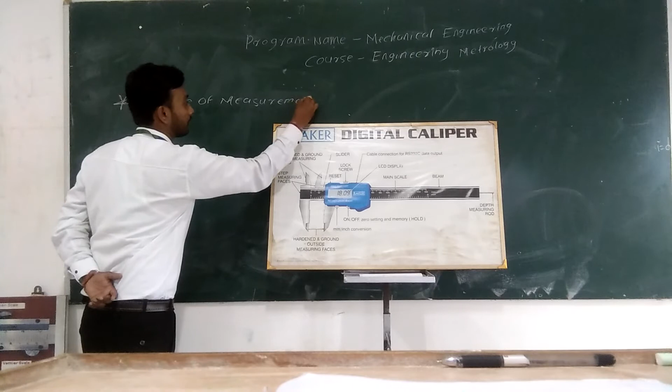What is metrology? Metrology is the science of measurement. In any industrial application, measurement is necessary.

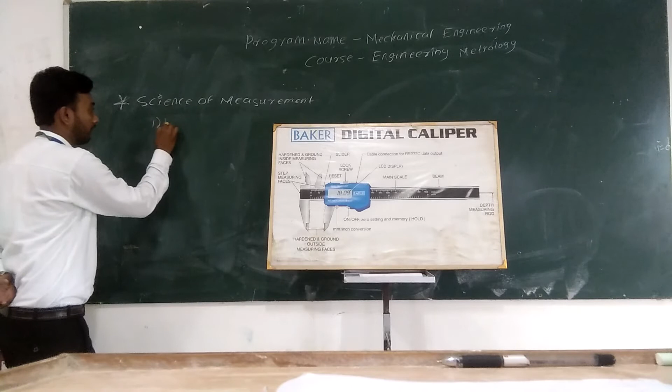For measuring purposes in metrology, there are four basic instruments used: vernier caliper, micrometer, dial gauge, and height gauge. These are the four basic instruments used in metrology for measuring purpose.

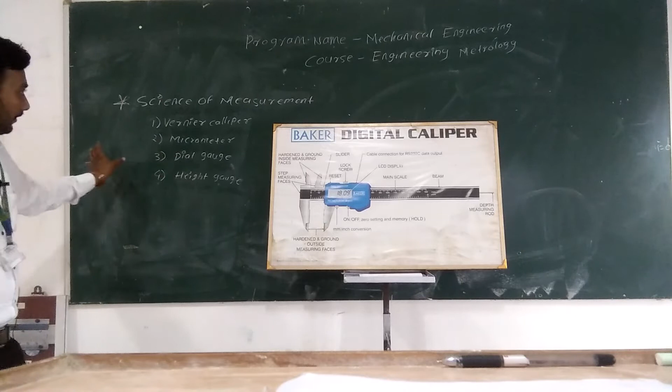Today we are only focusing on vernier caliper.

Before taking a reading, let's see what the vernier caliper is and how it looks, and its parts. This is the digital vernier caliper. Vernier caliper has two types: mechanical type and digital.

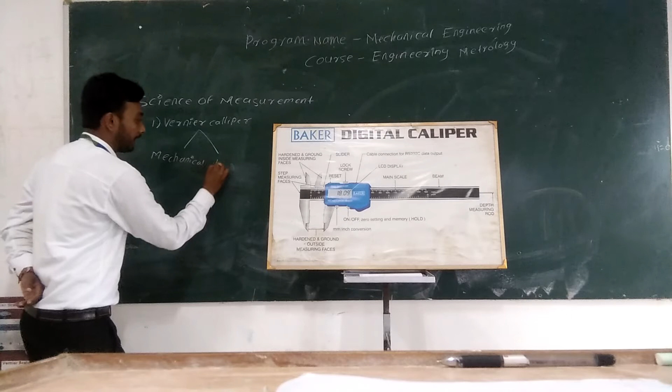The only basic difference is that in digital vernier caliper we get a direct reading on the LCD display. In mechanical vernier caliper, we have to calculate the reading.

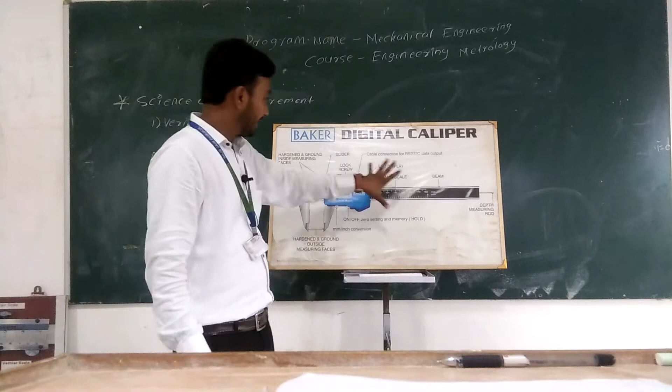These are the basic parts of the vernier caliper. On the upper side, hardened and ground inside measuring faces - that is the upper jaw. These are used to measure inside dimensions of a workpiece, that is the inside diameter. On the lower side, hardened and ground outside measuring faces measure the outside diameter of any workpiece.

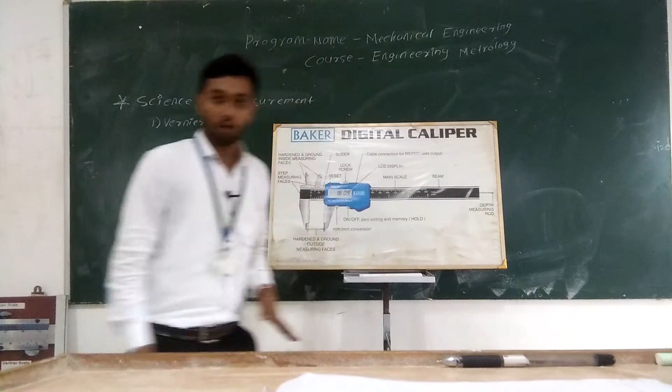On the right hand side, there is a depth measuring rod, used to measure height or depth of any workpiece. These are the basic three functions of vernier: inside diameter, outside diameter, and height or depth of any workpiece.

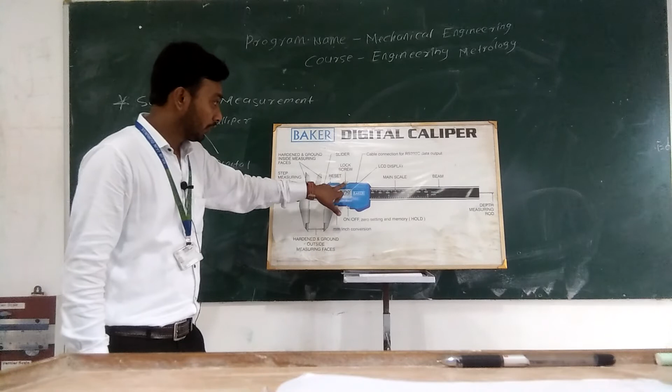Other parts include a lock screw to lock the vernier reading, on the bottom side an on/off or zero setting button, on the upper side a reset button, and the LCD display where we directly get the reading in mm or inch as needed.

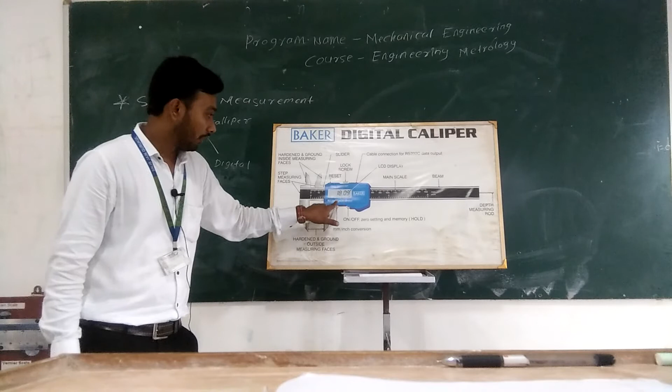In the vernier there are two scales: main scale and vernier scale. This is the main scale, this is the beam.

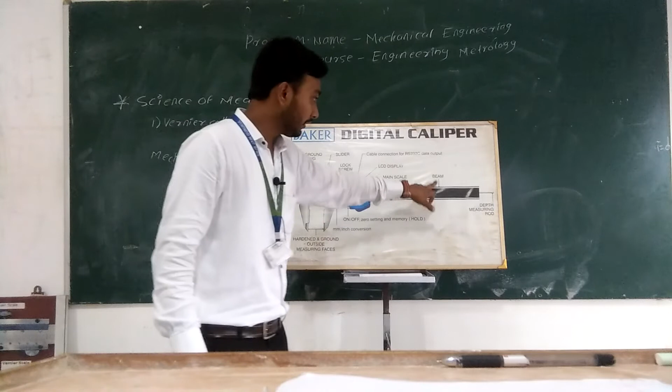Now we study how to take a reading on the vernier caliper. This is the actual vernier caliper. These are the lower jaws for measuring the outside diameter of any workpiece. The upper jaw measures the inside diameter. This is the depth rod to measure the height or depth of any workpiece. This is the main scale, this is the vernier scale, this is the lock screw, this is the slider.

Two scales are present in the vernier: the main scale and the vernier scale. The vernier scale is on the bottom side, the main scale on the top side. These are the two scales.

Any instrument has some least count. What is the least count? Least count means the smallest value that can be measured using that instrument. The vernier caliper also has a least count. What is the formula for least count? Least count LC is equal to the value of the smallest division on MS, where MS means main scale.

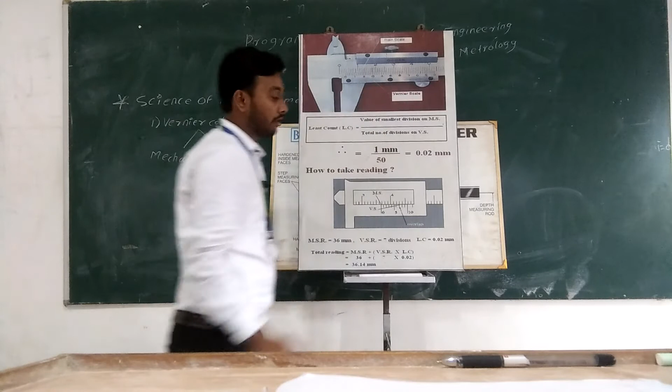Where is the main scale? Here - value of smallest division on main scale. What is the value of the smallest division on the main scale? This is 1mm, up to 10, then up to 20, then 30, 40, 50. Which is the smallest division? 1 mm. That's why here it is 1mm upon total number of divisions on VS.

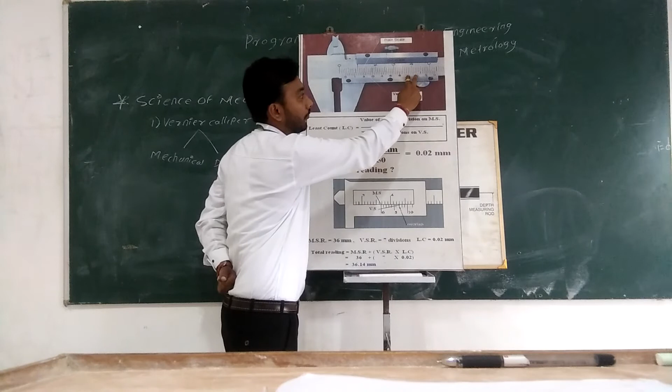What is VS? Vernier scale, here from the bottom side. Total number of divisions on the vernier scale: 1, 2, 3, 4, 5, up to 2 it's 10, up to 3 it's 15, 20, 25, 30, 35, 40, 45 and 50. What we want is the total number of divisions - how many is it? 50. Divide by 50, 1 divided by 50.

That gives 0.02 mm. This is the least count of the vernier caliper. So we can measure up to 0.02 mm, which is the accuracy of this vernier caliper.

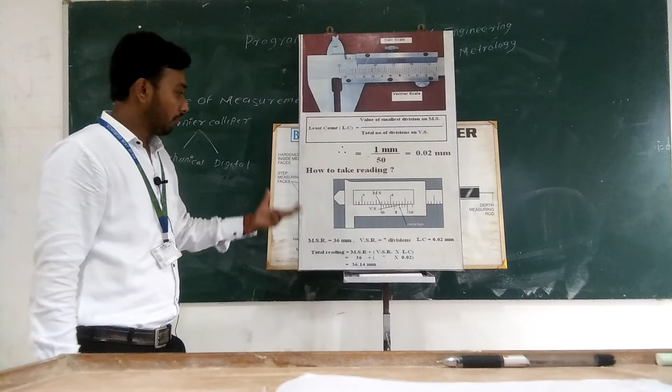Now we see how to take readings on the vernier caliper. We have two jobs: one is hollow and one is a rod. This is the actual vernier caliper. If we have to measure the outer diameter of this workpiece, which jaw can we use - this one or this one? Because this is used for outside diameter, this is used for inside diameter.

We can see this is used for outside diameter, and if we have a hollow job, we can use the upper jaw for inside diameter measurement. Or if we have to measure the depth or height of any job, we can use the depth gauge to measure the height of any workpiece.

So now we can measure the dimension of this workpiece. For measuring there is one formula: total reading is equal to MSR, main scale reading, plus VSR, vernier scale reading, into LC, where LC means least count.

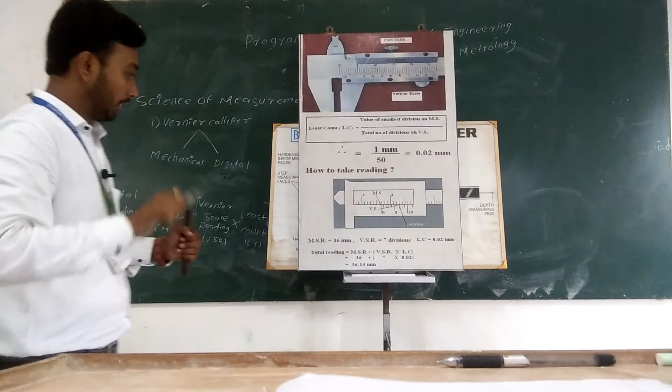Now we measure. If we have to measure the diameter of this workpiece, what is first? Main scale reading. Where is the main scale? Main scale reading - it is 36.

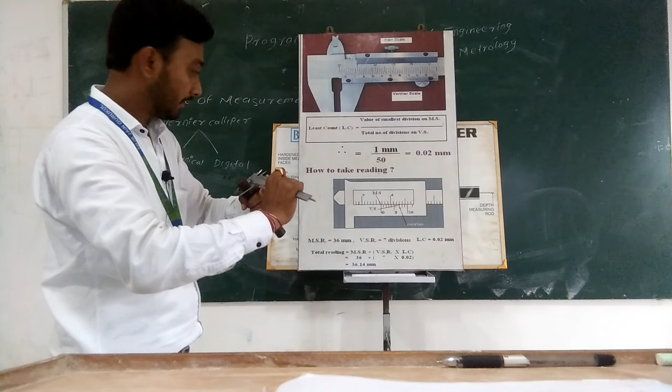Plus vernier scale reading - where is the vernier scale? Here on the bottom side, vernier scale reading. So we have to measure the divisions - it is 7, into least count. What is the least count of the vernier? We can see it is 0.02.

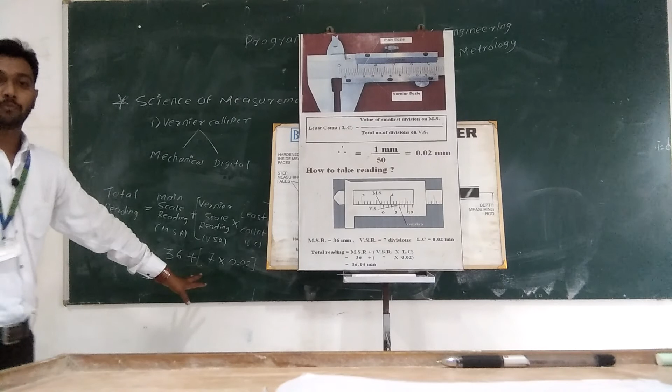What is the calculation of this? 36.14 in mm. In this way we get readings on the vernier caliper.